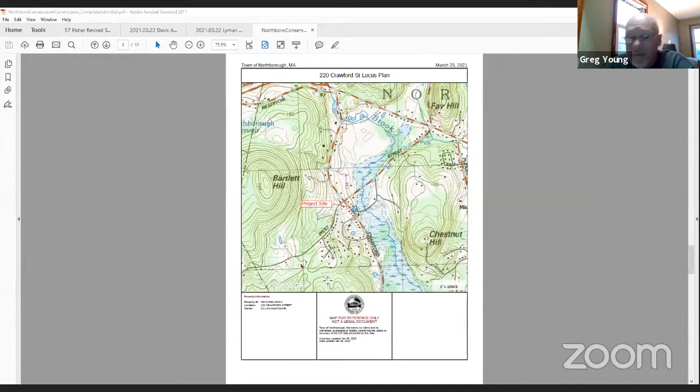Mia, do we have any plans to put up? Sure, I can share those for the commission. The house is located right at the corner of Cherry and Crawford. Can you see the project site? Yep, and then that's the current layout - chain link fence along the edge of the property with wetlands right beyond.

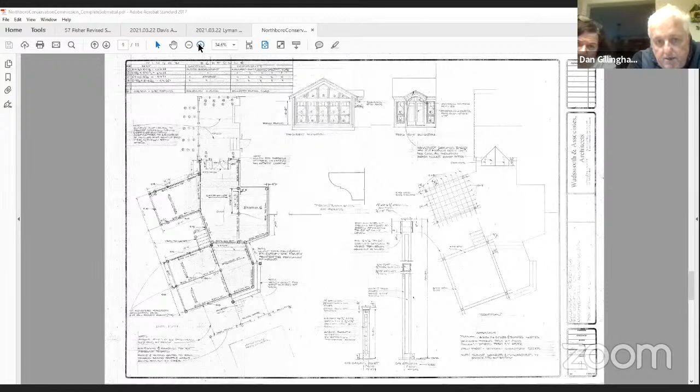These are the architectural drawings, Dan? Yeah, correct, they're the preliminary ones. We haven't arranged with a contractor yet, and we may have to downscale our sizing a little based on the costs of lumber these days. So that's what the extreme was, and we're going to put it out to bid that way.

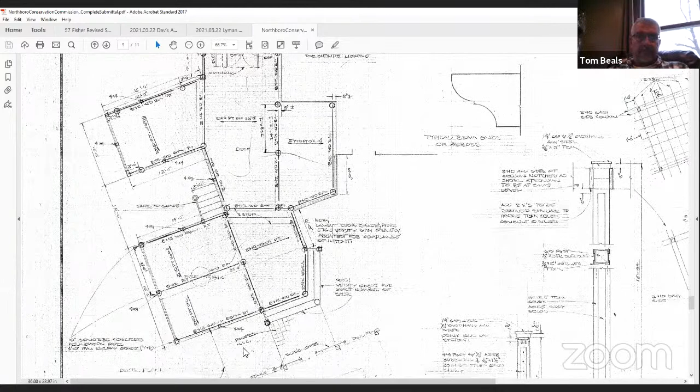Do we have any photos? Yes. So when you're standing on the deck looking at the pool, the land slopes off to the right fairly significantly, going down to the chain link fences, and the wetlands lie beyond those fences. That's for the front yard - it's from the front. So the deck's going to go off the side there.

There's the old deck. There's a better one in here. So the deck's going to go off to the right toward the forsythia, and that slope down is pretty steep with the chain link fence at the end.

So we're going over existing lawn. Correct, yep. And how far is the deck from the wetland boundary? Mia, what was it? About 40 feet. Outside the no-build zone.

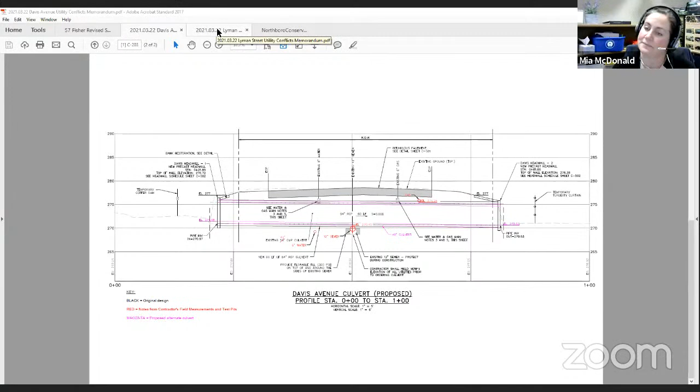I would like a vote that you find it insignificant or significant, depending on what you think. I recommend it's insignificant. So moved.

Second. Diane, roll call. Todd Helwig, yes. Diane Gouldner, yes. Kelly Marston, yes. Dan Clark, yes. Justin Dufresne, yes. Tom Beals, yes, and I will vote yes.

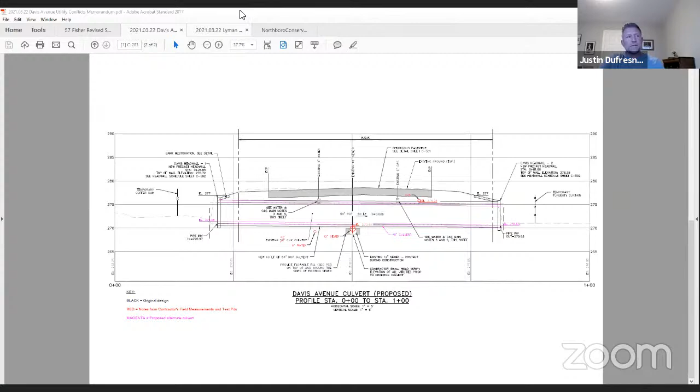Can you see Lyman Street now? Yes. So the changes here: the location of the 4-inch gas main was confirmed above the existing culvert, and the 12-inch water main was found to be located below the existing culvert, conflicting with the original survey.

The proposed 48-inch culvert with 24-inch embedment—remember, this one was going to be embedded so that it was almost like an open bottom to create some natural substrate—can't be constructed as approved without major impacts to the existing water and gas.

They're proposing to install a 30-inch reinforced concrete pipe in lieu of the previously approved 48-inch. They're not losing any diameter because the previous 48-inch was going to be embedded, so it'll still handle the flow, but we'll lose that natural bottom.

The proposed alternative does not include embedment of the culvert due to the location of the water main. The proposed inverts of the 30-inch culvert are shown in the attached figure, and they updated the HydroCAD, and it will still provide the needed flow for the 100-year storm.

So this is it here. Again, I recommend this one—it's insignificant as well.

Questions or concerns? Can we get a motion? Move that there's no significant change.

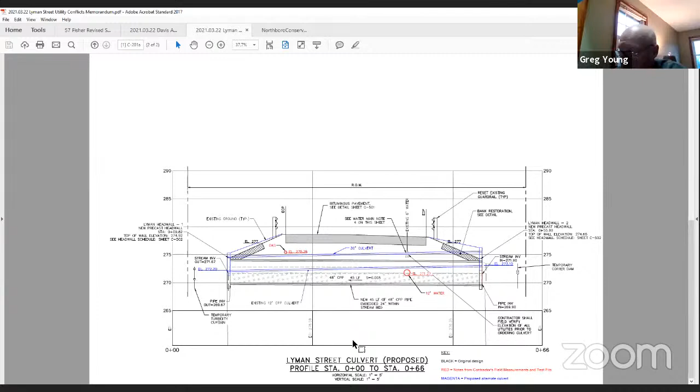Second, seconded by Tom Beals. Roll call. Todd Helwig, yes. Diane Goldner, yes. Kelly Marston, yes. Dan Clark, yes. Justin Dufresne, yes. Tom Beals, yes. I also will vote yes.

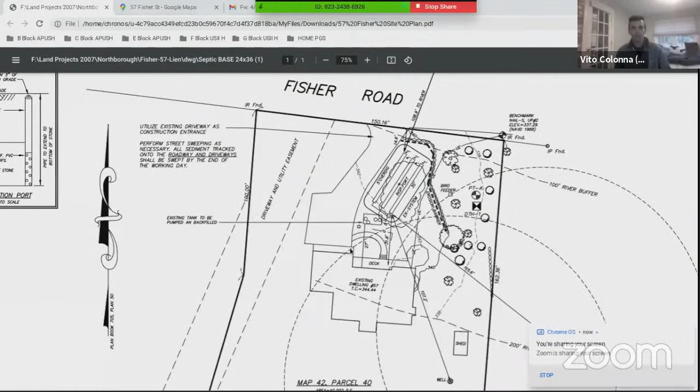I can share my screen quick here. Okay, so this is the plan. 57 Fisher Road is off Church Street. Come down Crawford and turn onto Fisher, and it's right in here.

There's a stream across the street, Cold Harbor Brook, that's across the street right there, and that 200-foot riverfront area extends well up into the site. So we did look at moving the system towards the rear of the yard, but there are 2 wells, one on site and then one on the abutter's site over here.

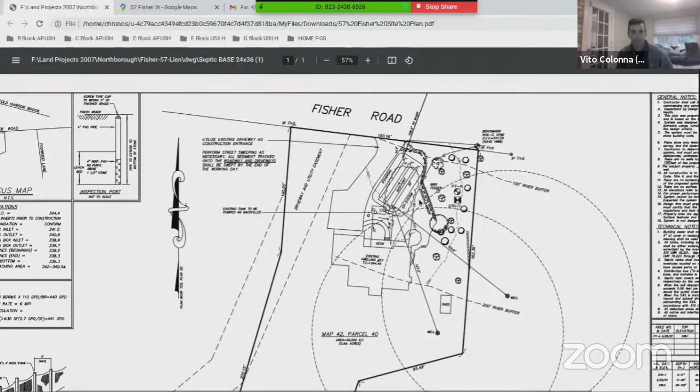So that kind of pins us in with the 100-foot offsets from the wells. It doesn't really give us too much space to work with. So this is kind of the only area left on site to locate that replacement septic system, and it's actually in the same spot as the existing system now. So we just remove the old one, replace it with a new one, with all new components. And we have the erosion barrier around the edge of the limit of work. And then in the end, we're set about 108 feet to the end of the river, so we're outside the 100-foot buffer, but still within that outer 100 to 200-foot riverfront area. I think that's basically it, pretty straightforward from our end anyway.

Peter, where's the new tank gonna go? It's right in here, essentially where the old one was. We're kind of just pulling the old one or backfilling it and then putting a new one in.

Questions from the commission?

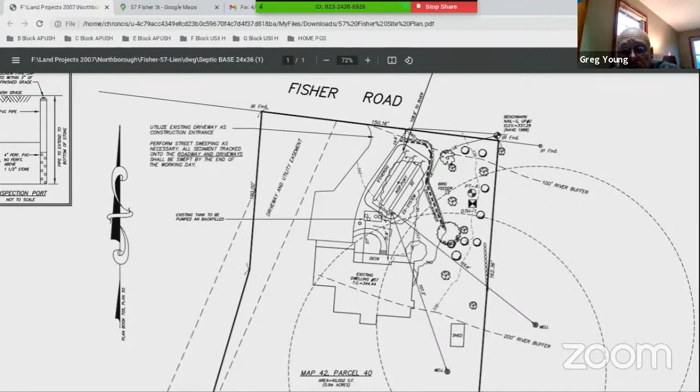A question on what we can do without getting a DEP file number or review by DEP. You can, but I don't recommend ever closing without a DEP file number. Right, so we will have to continue this until the next meeting.

Yeah, because most of the time, Vito, you can correct me, but if it starts to really fail, they can pump the tank and that'll give them another week or two. But if it really drastically fails and we have sewage coming out in the street, we can proceed under emergency certification with the plans as shown until we can issue the order next month. Yeah, that's right.

We're going to continue this to - we'll just say the May meeting.

We should grab public comment if possible. Let's see if we have any public comment. Anybody? I'm looking for, I don't see any raised hands. Nope. Going once, twice. Done.

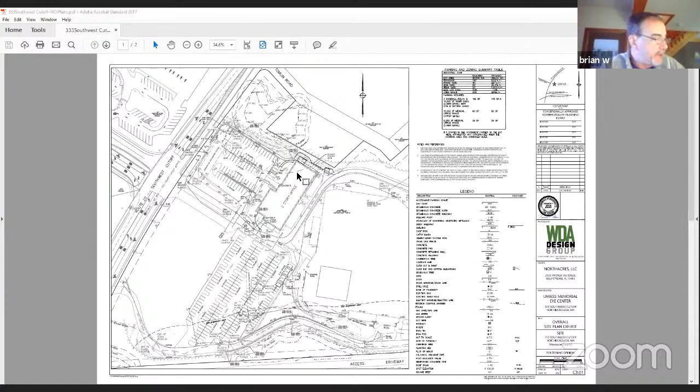Do you want me to share my screen with the plan? Sure, if you would. Well, this is kind of the overall plan. So it's the two-story office there, and as Mia's circling, we're proposing essentially a 15 by 23 foot addition off the end of the building. This is to house an elevator and stairwell to service the UMass building.

The medical office is on the upper floor of this building, and the New England baseball had space on the bottom, but UMass is taking over some of that space. Their services have expanded, and it needs to be serviced by an elevator. The only place to put it is in this location. So the idea would be to...

Mia, do you have the new plan I sent you this morning? Oh, was that this morning? The one that we adjusted, the one wetland flag there and the setback? Let me grab that.

Can you see it? Nope, that's not it. That was our site walk. Yeah.

No, I have— all right, well, oh, there it is. No, I do have it. It was with the estimates. Yep, here it is. Excellent.

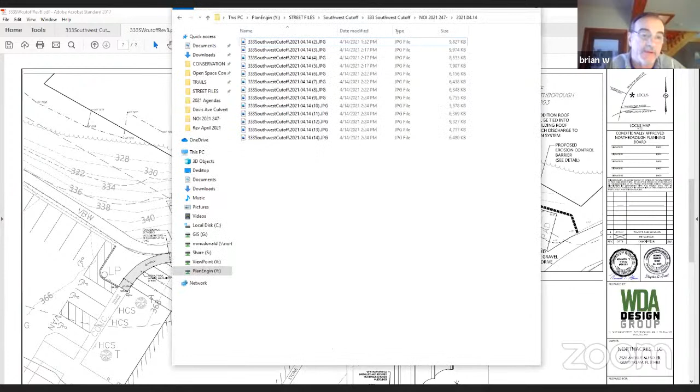So we'll create that cut to about 2 feet, where you see the spot grades there from 347 along the edge of the building down to 345. It'll be a 10-foot wide gravel path just to get the machine in there, and then they can back out. The existing grass that remains on the side slope below the erosion control will stay, and anything disturbed above it will be reseeded.

And Brian, how far down are they digging, how deep? I believe it's 4 feet, but is Greg O'Connor on with us, the architect?

Should be Greg O'Connor Architects. Yep, I just promoted him over to panelist. He should be with you shortly. Thank you.

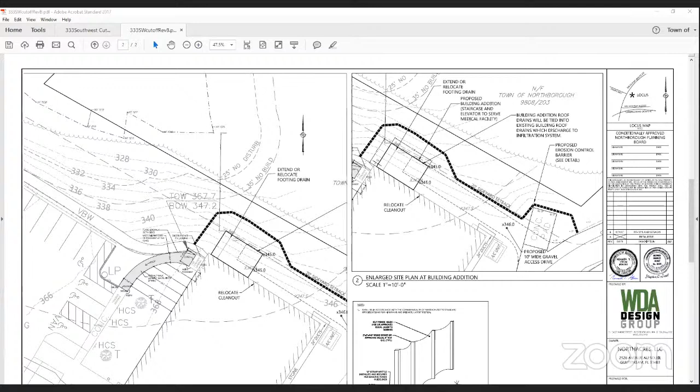Yes, Greg O'Connor here. Hi, Greg. This is Brian—they had a question on how deep we need to dig, and I was recalling that it was 4 feet. Yes, 4 foot. Okay.

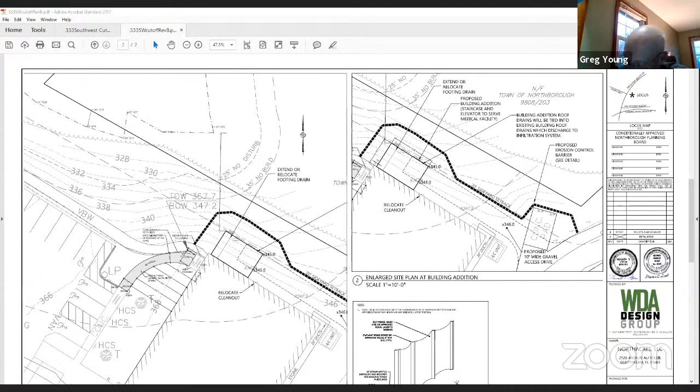Mia, do you have some photos? Sure.

Can you see it? This is the wetland from the parking lot in front. Yeah, that's up on top of the retaining wall. And this is the corner of the building from the front. Then this is the slope—you're talking roughly where those windows are going up.

So as you saw, wow, action photo—you're there for scale, that's an action photo. I don't provide much scale.

And that's the wetland below—you can see a couple of the blue flags there. The wetland actually is above what you would see, the herbaceous breakout there. But you can see an old silt fence remaining from the historic project, the black line down there. So we discussed the new silt fence comes up quite a bit from that—it's halfway up on the slope. That can either be taken out when they put the new one in, or wait till the project's done and take them both out when things are stabilized.

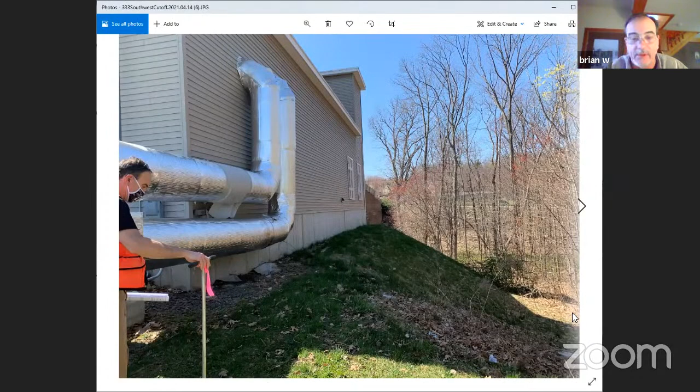There's not a lot of erosion potential once we cut the pad, the access pad, because there's still the grass between it and the face of it and the edge of the gravel. But once we cut it in, if you want to take a look at it and we think we should do something additional, we can certainly add something more. Between putting the gravel on the cut 10-foot wide pad and the erosion control barrier with the existing grass, it should provide a pretty good erosion barrier and not lend itself to a lot of erosion potential. But we can certainly look at it once we get it cut in, if you guys want to see if you think we should add something.

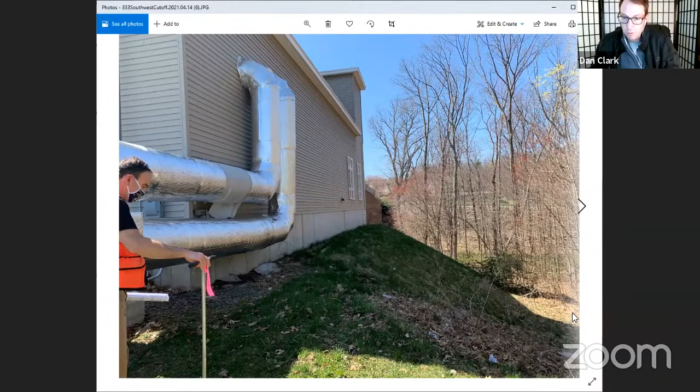Any questions from the commission? I had a quick question. What prevents you from using the other side of the building or the back of the building?

I'll defer that to Greg. Yeah, the decision to put this at that end is we are only renting that end of the building for UMass. The baseball facility will remain on the other end of the building, so UMass's space doesn't go all the way to the opposite side of the building. So, okay, so the baseball owns the building? The baseball folks are going to still have half of that lower level.

You seem puzzled still. Well, I guess I don't - so they don't want the elevator. The elevator is solely for UMass. It's not a common facility for the building. I see, okay.

You good for now, Dan? Yeah. Any more questions from the commission? Now, me and Brian - this access from the dumpster pad, that's just temporary then? So at the end of it, they'll just pull all that out and reseed it? Is that the plan for that? I believe that is the case, yes.

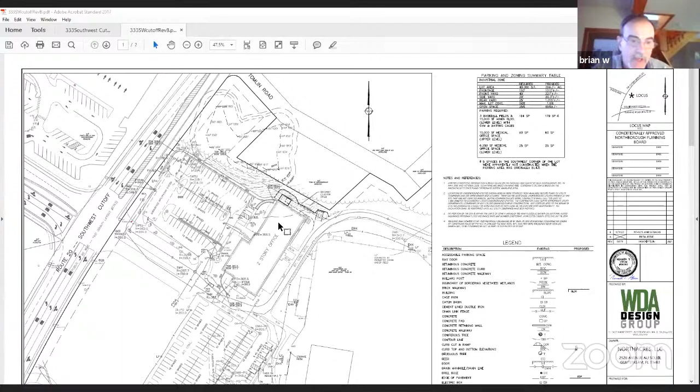No, what they - can you go to the full-size plan please, Mia? Might be easier to describe it in there. Right, so yeah, the parking for the baseball field is in that southern lot. And then their access doors are the two right-hand corner there. And then they walk down the paved bit conc drive to the lower ball field, or they just access into the two upper fields straight through there.

So there's really nothing - I mean, I guess if they wanted to take a walk over the grass or past the dumpster, they could, but as you can see, it drops off. And then if you go around there, it's down into the wetland, or you're at the base of the 20-foot wall. So if there's any trash, it's probably just when someone threw it in the dumpster or missed the dumpster, would be my guess. But the baseball players can go into the workout rooms and things at the bottom of the building through that back access, or they walk out directly onto the fields, or down the bit conc drive that goes to the rear field. Everything else towards the front is for UMass.

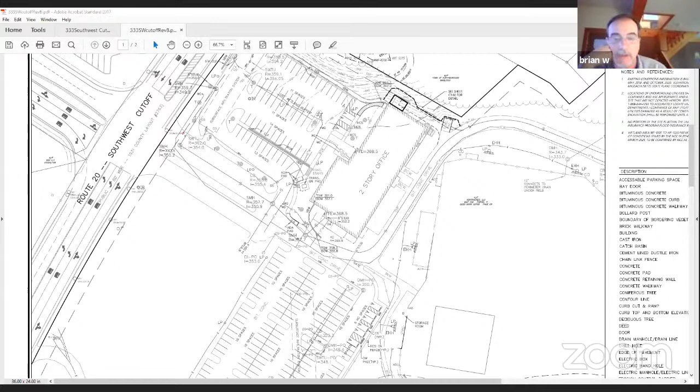Could I recommend an enclosure for the dumpster to prevent that trash from migrating? Can you go back to the photos? I didn't remember a lot of trash, but. There's not a lot, I just noticed some, and you know. We had the other day - the majority of trash was by far disposable face masks.

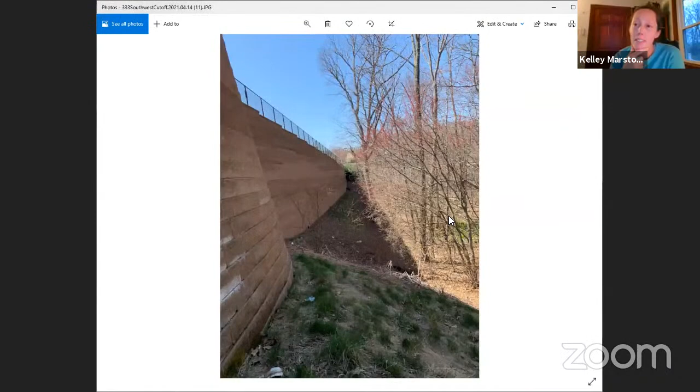Yeah, yeah, in front. Fortunately, but I just know kids - if you give them a place to hide and hang out, they're gonna hide and hang out. Well, these kids are under the gun, that's high-end baseball, so when they're there, they're being put through their paces. Trust me. But yeah, I do see some debris, but that could have been from old construction stuff. That's - things already cover on the dumpster too.

It looks pretty clean around it for the most part. There's a few odds and ends that could have been old construction cups or something, but the majority of the trash was up here along this chain link fence, and it was all face masks and gloves. It's generally contained up there, one because of the fence, it can't blow over, and two, you have a curb. So that's really housekeeping for them to clean up in the spring, or maybe eventually we'll get away from having face masks on all the time.

Are you good? Any questions? Any follow-ups? Okay.

Mia, there's a question here about the stormwater system not having been maintained. We talked a little about that, why don't you give us a brief. Yeah, I was looking in the file. I didn't find any reports for the maintenance of the stormwater system, or a statement that the system had been constructed and was functioning as designed. So I asked Brian, and today the owner has contracted someone to do the initial cleaning, and they provided an estimate for annual cleaning, which would be nice if they provided.

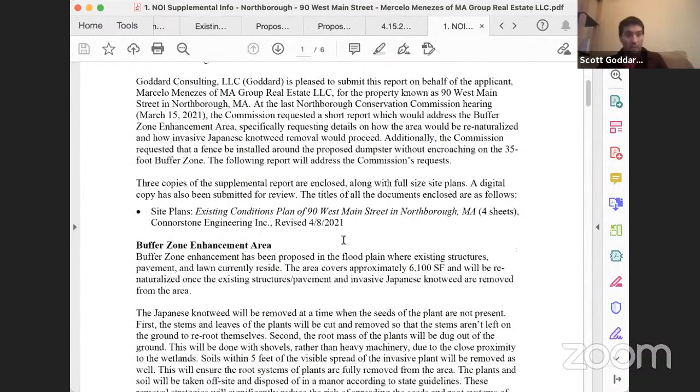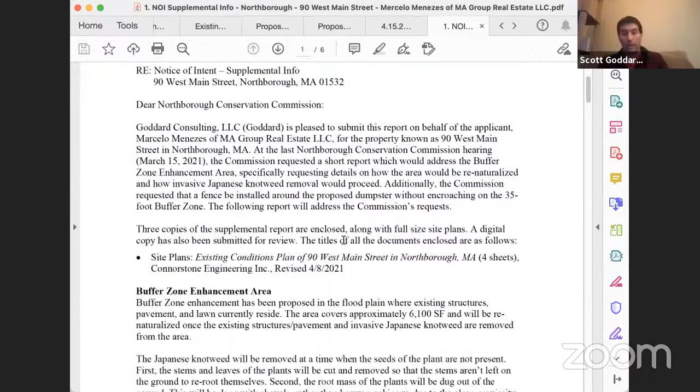Scott Goddard, professional wetland scientist representing the applicants at 90 West Main Street. This letter is supplemental information that was submitted discussing the buffer zone enhancement and the removal of the Japanese knotweed that was requested, sent in by Mitch from my office. Then we have the existing and proposed site plan. The only modification since the last version you all saw was showing the chain link fence around the dumpster pad at the rear of the building, which was the only remaining issue at play.

There were some DEP comments that came in that I can address briefly. Also, a question came up at the last meeting about the overall reduction in impervious surface within the riverfront area. The existing numbers show 4,140 square feet of impervious surfaces, structures, and pavement in the riverfront area, and our proposed condition is 70 square feet, virtually eliminating all impervious surfaces within the riverfront area on the site. Also, the limits of all these activities are pulled much further back.

So it's not just a reduction in area. The work we're doing is only at the furthest extent of the riverfront area, as opposed to that 4,000 and change, which is all much closer, of course, to the river.

There was a question from Kimberly Roth at DEP about reviewing portions of the project under 1058-4. That is really not appropriate in this case. This is a redevelopment project. We're not considering the lawn as a degraded surface. It's part of a larger prior development of the site made up of both degraded and non-degraded previously developed surfaces. So there's really nothing on this site that warrants a 1058-4 type of analysis. Any alternatives that were presented would only be alternatives that would have greater impact to riverfront area. So it's sort of an unnecessary exercise in my opinion.

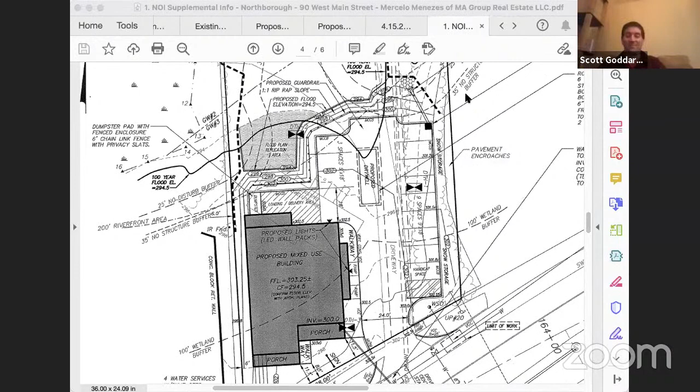Okay, so is the plan here, let me see if I understand: the plan is to A, close the hearing, B, vote on the NOI, and if approved, condition the issuance of the NOI based on receipt and agreement of the table from Scott to Mia.

So moved. Can I do that? You got to make a motion to close the hearing first. Is that the understanding, Mia? We're going to do it? Yeah, we'll close the hearing, as long as we're okay with that table coming in.

Just checking minutes. Make a motion that we close the hearing. Second by Diane. To close the hearing, roll call vote: Todd, yes. Diane, yes. Kelley, yes. Dan, yes. Justin, yes. Tom, yes.

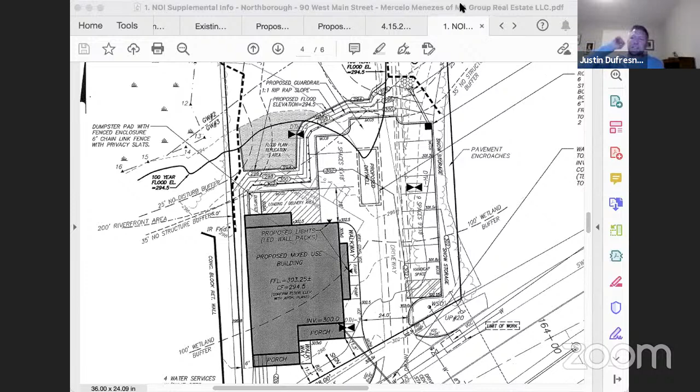And I vote yes. I missed the motion, who made the motion and seconded? Motion made by Tom, second by Kelly, wasn't it? Yes. Or Diane? No, Diane seconded the motion. Okay, I agree with what you first said.

Okay, for special conditions, I have noted monitoring of the replication area. It's going to come over from the previous order. Right. Typical stormwater maintenance and O&M, and the O&M will be appended to the order. Anything else?

Receipt of that table, prior to issuance. Is it just a table, Mia, or is it more than the table? I don't want to pigeonhole this if it's not correct. The table is just quantifying impacts to the RFA as new development and redevelopment separately.

Okay, and that'll be received and agreed to by you prior to issuance, correct? Prior to issuance, or issuance is the proper term, I guess. Okay, so we're voting now on the permanent markers, trying to think of any other conditions.

I think we have a pretty good drop off there, so I actually don't recommend permanent markers, and that replication area is filling in fine. Yeah, and that'll be way in the back, but then we're going to have the naturalized BLSF area. How much is that? Oh, no, it's good, it's a nice steep drop off. They're not going to get their mower down there.

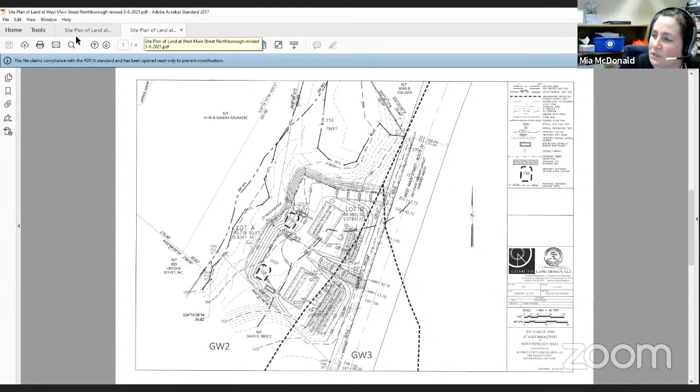Can you see it? This is the revised plan. I'm just going to show you the original too, so you can compare. Look at the slopes along the back, make it a little bit larger. Sure. Okay, so this is the previous revision, and this is the new revision.

As Mia switches back and forth, you can see on the north and west sides of that driveway serving Lot B, we had proposed a 1-to-1 slope. In response to the commission's request at the last meeting on March 15th, we pulled that driveway slightly towards the house on Lot B, and I propose now a Canigliaro block retaining wall with 3.5 feet exposed height. Those small changes allowed us to change the proposed slope below the retaining wall to a 2-to-1 grade.

And you still stayed outside the 25, is that correct? Correct. We essentially did not move the erosion control barriers from the location previously shown. Maybe there's a symbol here or there that moved a fraction of a foot, but it's in essentially the same location.

Can you shrink that down a little bit? You want it smaller, to get a better view of the whole site? Sure, yeah. Okay.

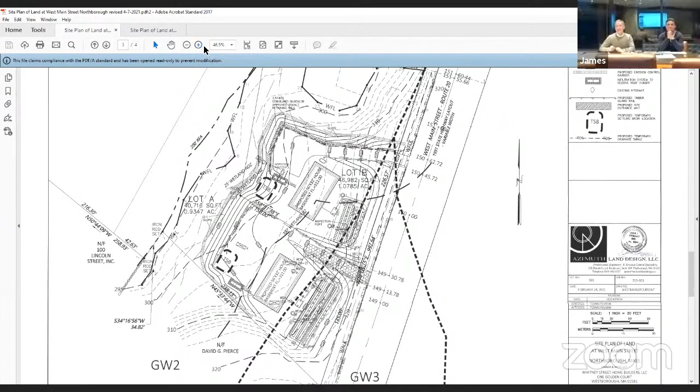I had sent an email to Mia to ask that specific question. I was 99-point-something percent sure that the wall would count as a structure, but I asked and she quickly emailed me back that it would count. That was actually why the limits of the driveway moved slightly. I had to move those limits to be able to keep the wall, because we're showing the wall as a 2-foot thick structure, which is what those Canigliaro block walls are. They're typically a 2-foot thick block, also 2 feet high. In this case, you'd have the bottom 6 inches not exposed, so you'd have a two-layer thick wall to get the 3.5 feet exposed height.

Yeah, I know that Mia received quite a few phone calls from the public as you started to do some work on the site. Yep. I believe we had an issue with the erosion control devices, but they've been positioned correctly since then.

True. What Mia sent us is a message noting that in two areas, close to flag numbers 7 and 8, and close to flag numbers 23 and 24, where S&M Farms had put in the barrier, they had just done a straight line and got closer than shown on this plan in those locations. There's no work going on currently. As soon as an order is hopefully issued and work is allowed to proceed, we will move the barrier. We will contact Mia to confirm it's in the correct location in those couple of spots, and then we would proceed with work from there.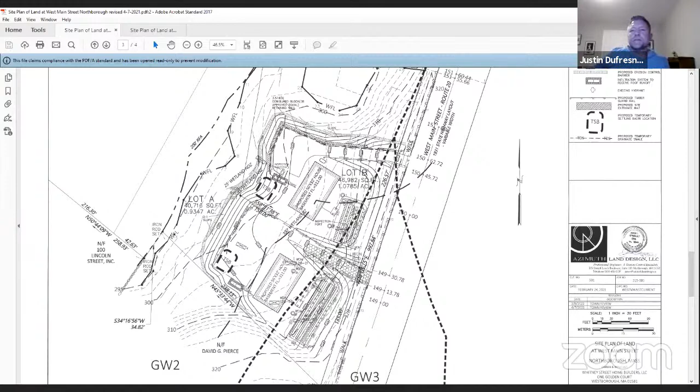Is it just me? I'm having trouble seeing the extent of this driveway. I can see the top driveway. I think it comes around the back. Oh right, it's all of it.

Unfortunately it almost overlaps the 100-foot buffer zone line behind the house on Lot A, so it's hard to see there. Underneath we have the line for a temporary drain swale, which is right along the edge of the pavement but further back. So there's two different lines that almost overlap, sorry. I just wanted to make sure I could see it. It's there.

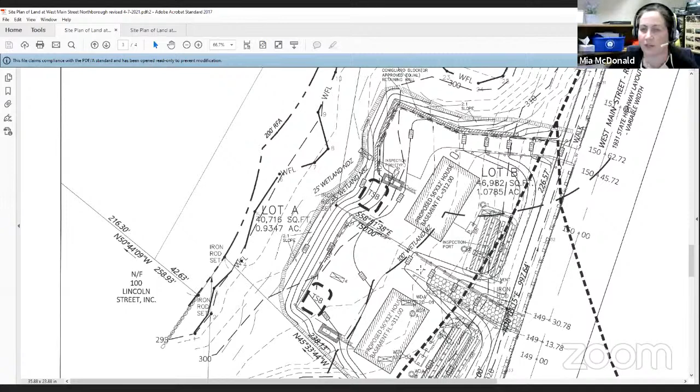I think everything that we asked for has been met.

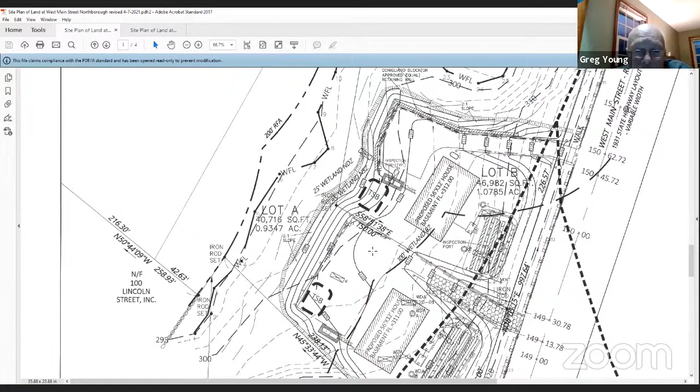Any attendees, any public comments? I don't see any.

Kelly, we should ask your friend to rename if it really is someone different, just because for the public record we do ask people to identify themselves.

I did, I just texted them and forwarded my link. I went to the town's website, since it's kind of hard to find if you don't know where to go. So I dug through, opened the agenda, and copied the link for them. So they show up under your name as an attendee? Yeah, probably. We attended a friend's thesis dissertation today too, we do a lot of things in a group. And what better way to end the day than attend the Concom meeting? So there you go.

Okay, no more questions from the commission? I agree, I think everything we asked for has been done. That slope is gone from 1 to 1, and they've taken the approaches there.

So we'll motion to close the hearing. So moved. Seconded by Diane. Vote to close the hearing: Todd Helwig, yes. Diane Gouldner, yes. Kelly Marston, yes. Dan Clark, yes. Justin Dufresne, yes. Tom Beals, yes. I also vote yes.

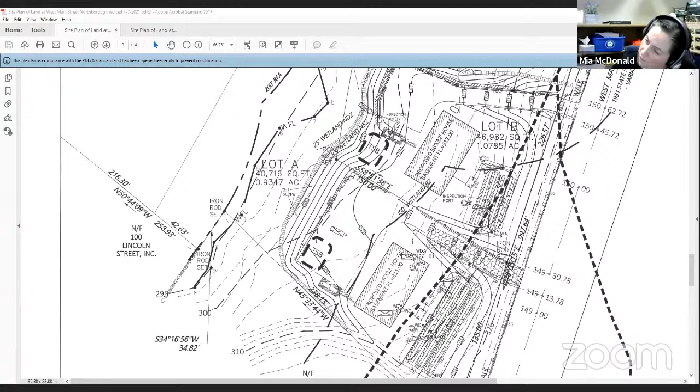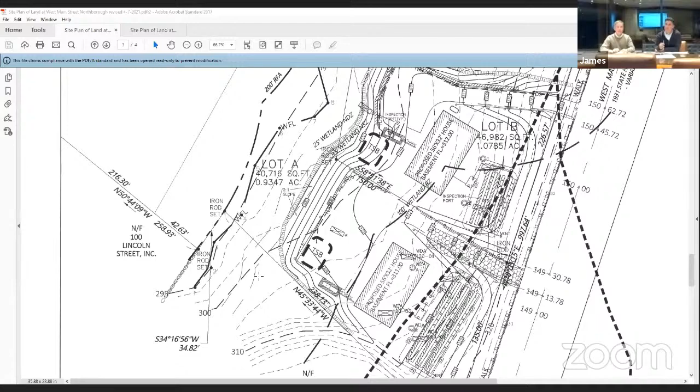I guess it's a little hard to say, it depends on how the plow driver is doing his thing. I just worry about sand and salt mixed up. I know what my yard looks like in the spring, so I can only imagine what that's going to look like.

Yeah, we don't want it pushed back here. These are just houses, right? Yes, I don't think we've ever required anybody to show a snow storage area for a single family home before. Who knows what they're going to do if they use a snow blower. I don't know that this is something we need to get into. Agreed.

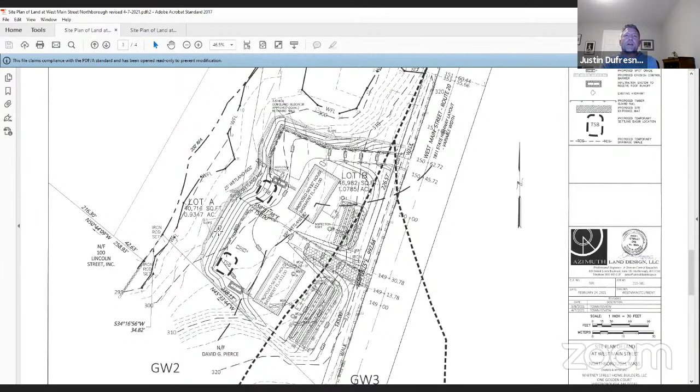I'd say the good thing with the guardrail is, not only from a vehicle standpoint, but from a plow standpoint, you're not going to be lifting it up over the guardrail unless you're in there with a Bobcat or something that could get it over the top. So I think having the guardrail alone should help prevent a little bit of that snow from getting back there, and I'd guess if it's a plow, they're going to push it more toward the sides that Mia identified, more so than the back. So I think we're probably good.

I would agree, that's good. Any more questions or comments from the commission?

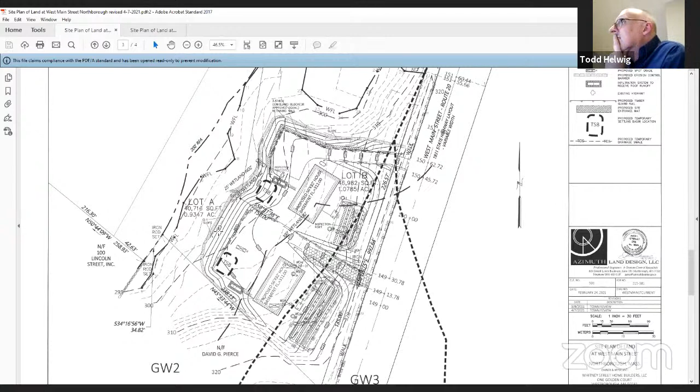I would like to make a motion to amend the order of conditions for 0 West Main Street to allow the construction of the 2 houses as shown on the plans, subject to the conditions we have discussed. Second, by Tom Beals. We'll do a roll call vote: Todd Helwig, yes. Diane Gouldner, yes. Kelly Marston, yep. Dan Clark, yes. Justin Dufresne, yes. Tom Beals, yes. And I vote yes.

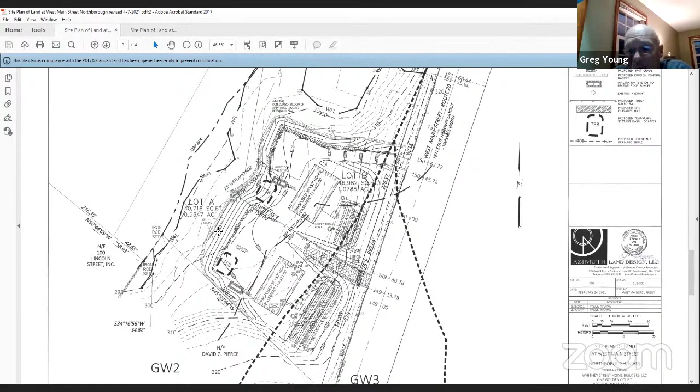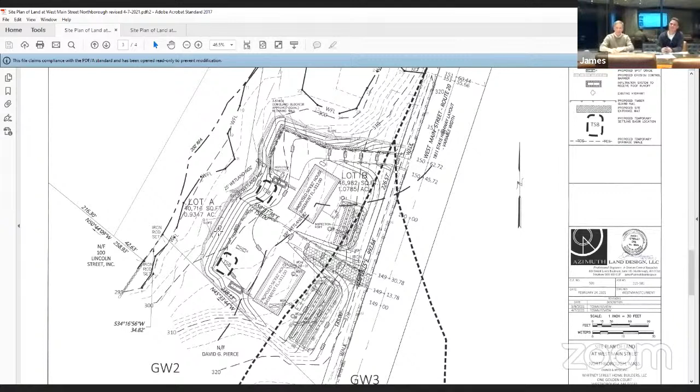Very good. Thank you, board. Thank you, folks. Well, thanks for working with us and coming back with the requested changes, appreciate that. And stay close to Mia. That site, I'm going to get lots of calls. So yeah, we're going to get lots of calls on that one. Understand. Thank you. Thank you, gentlemen. All right.

Moving right along here. We're moving right along, Mia. We are cooking. Well, I just jinxed it. All right, no, we jinxed it. I just jinxed it too, so.

Okay, let's talk about 85 & 95 West Street. And I believe that is Brian Waterman. Anybody else, Brian? How are you doing? Hi, Mark Kablak is with us. Yeah, Mark's here too. Yes, I'm here as well, Brian. Thank you. And Mark, what is your role? He's the attorney for the applicants. Okay good, thank you. All right, so where are we? We've been making some progress here.

We get some questions around the stormwater system and a culvert replacement, I believe. Yes, it's actually been since December since we first met on this. So we've continued. Mainly the two largest questions — well, there were three — the primary one was the permeability testing requested in each of the infiltrators, and we also did deep soil tests for composition. Those were completed and submitted to Fred and Mia. I'll go on that a little more in a minute, because that required some revisions to the design systems. The culvert, the existing historic stone culvert under Cherry Street—

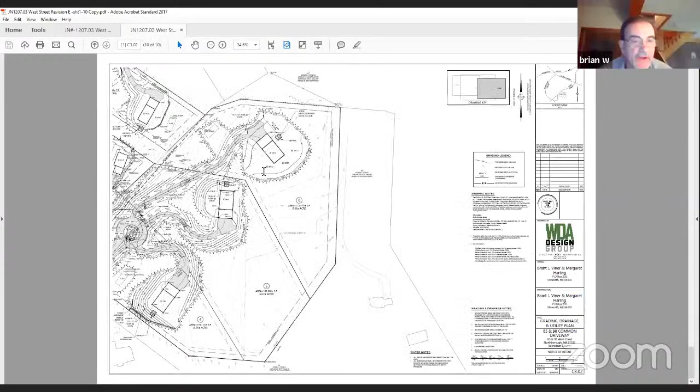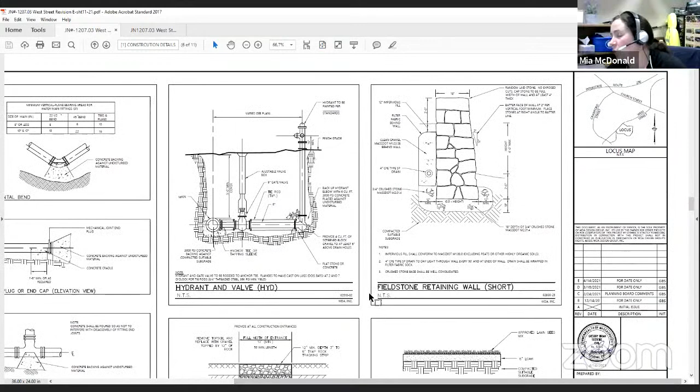I forgot about that one small stone retaining wall there. I think there's three - one here, one... oh here, yes, because he tightened up the grading on that when we raised it. So they're just small stone retaining walls, like a foot. Do we have a detail for them? They're no more than 2 feet because of the grade there. I thought he had some top and bottom wall shots on there. He might on another plan. Here it is - it says fieldstone retaining wall on sheet C601, height 4 feet max. So it won't need to be more. Oh yeah, there's the fieldstone detail.

What else was on the checklist? Winter stabilization - we added seeding mixes on the sheets. There's a lot of sheets in here.

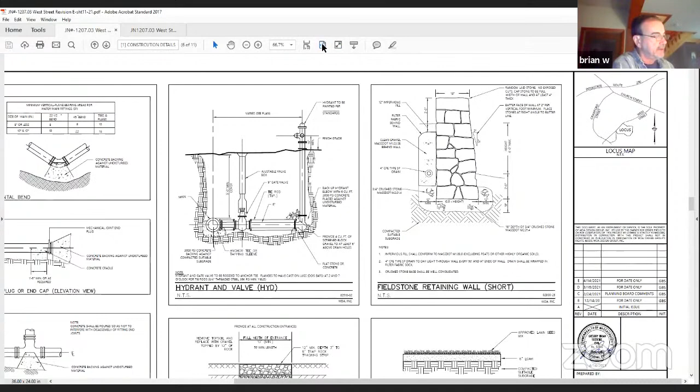We put a winter stabilization and permanent seeding note on sheet C602, so we have the permanent and seasonal seeding mixtures on there.

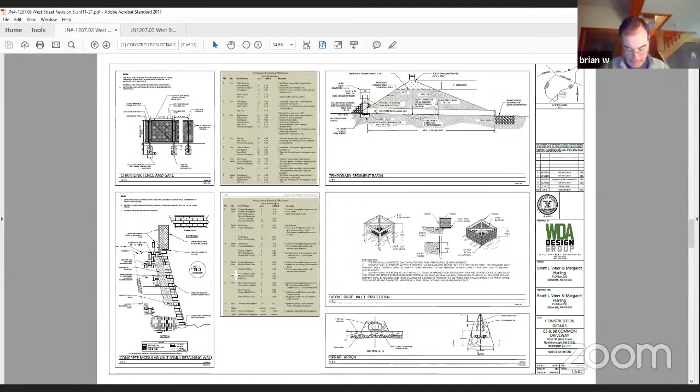What else do we say? Respond to Mass DEP comments. Mass DEP had no comments.

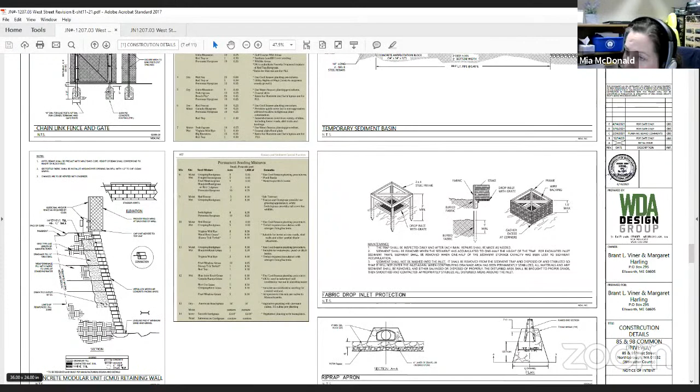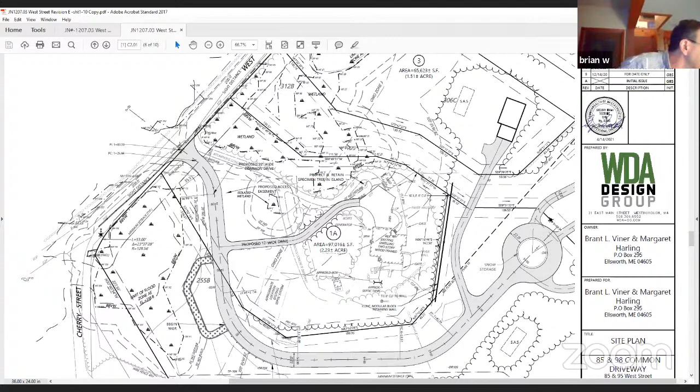And how tall is the reinforced retaining wall, this concrete modular one behind the existing house? Let's see, he's got a contour there of 342, and this is 340. That one looks like it runs from 2 to 4 feet. That's outside the buffer zone, but it looks like it's 2 feet on the low end, and existing there is 336, and maybe up to 4 feet on the end towards lot 3.

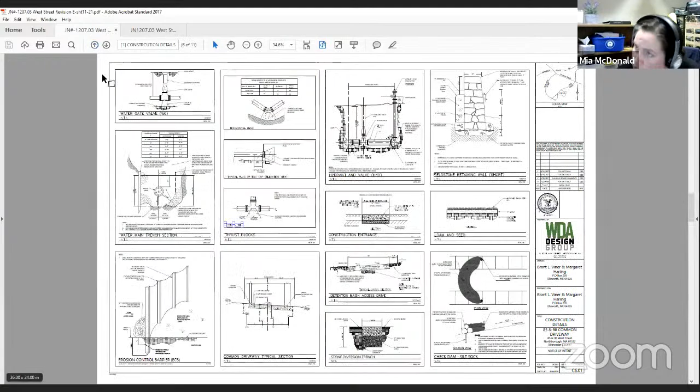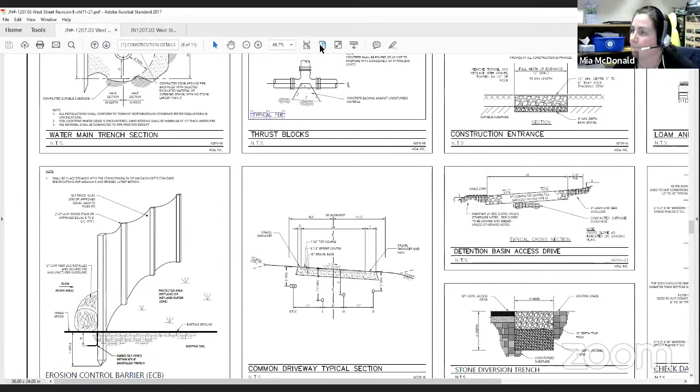Okay. Also, I hope I'm not taking you off track, but I found the detail for the erosion controls on C601, and it's still calling for the 12-inch. Did he not adjust that there? Yeah, 12-inch coir log. All right, well, that's a boo-boo. That's a small change, but it's what the contractor has in hand. Maybe he called it out in a note on one of the other plans, but I'll have that fixed.

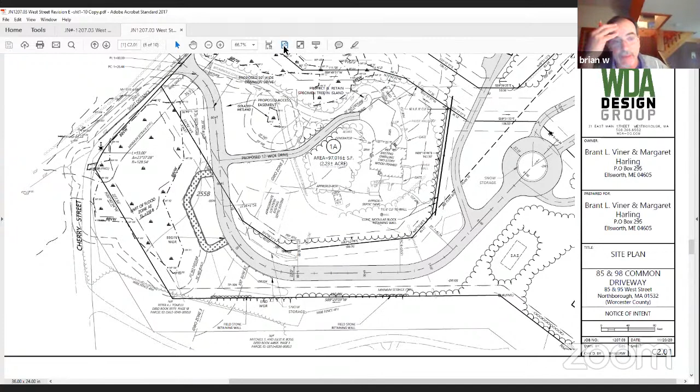So I think we've addressed everything and anything that's been asked. So I'll turn it over to you guys for questions or comments.

One question I have is about the abutter who attended a few of our meetings, Mr. Tonelli. Have there been any conversations with him? How is he feeling about all this now? I know he had some concerns originally, and I think you might have addressed them with your redesign of some of the flows. Yeah, his concern was the runoff from directly at lot 4 there.

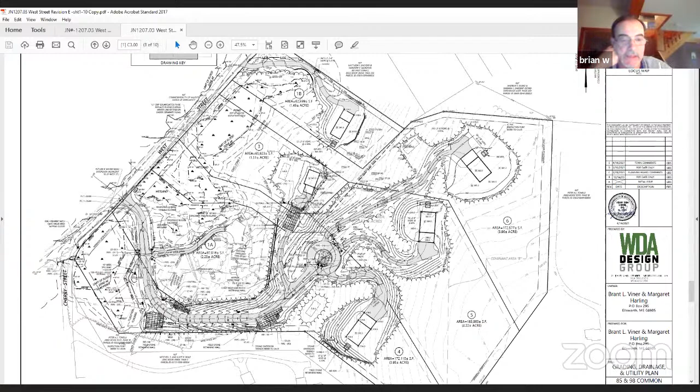Mia, if you want to zoom down to that. Yeah, if you can zoom. Sorry, that's okay. Hang on, went too far. The joy of Zoom meetings.

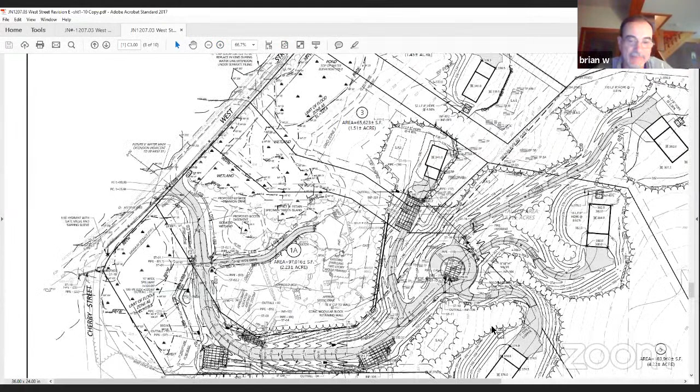So you can see that there's a very large hillside that flows towards his land as it is, and some of that's going to remain since we're only clearing around the house. But they had concerns about the immediate side yard directing flow directly, reconveying it down that way. So we added the small retaining wall and put in a stone diversion trench, so it keeps everything flowing towards the front of the yard and down there. We had sent that to his attorney, Marshall Gould. We've since reached out to them and they said they were good.

Questions from the commission or comments? I have a question. Go ahead, Diane. How are you going to encourage all these people to keep these...

I'm having trouble hearing her. I'm sorry, how are you going to have everybody coordinate or cooperate to clean out all these basins? Do you have a plan for them? Oh, on cleaning the basins?

Yes, that's written up in the covenant and easement document that they will be signing as owners, and that would get recorded with an order of conditions. As Mia mentioned, they'd probably just hand them a copy of the plan, and as a homeowners association, they'll more than likely all contract with one contractor that'll maintain the system annually, kind of like we just presented on 333 Southwest Cutoff, hiring one of these stormwater control companies that comes in and can do regular or annual inspections, and jet or vac truck these things as needed to maintain them. That document was prepared by the applicant's attorney and then reviewed by Fred, Mia, and then ultimately town counsel reviewed it and had minor comments that were applied per his comments.

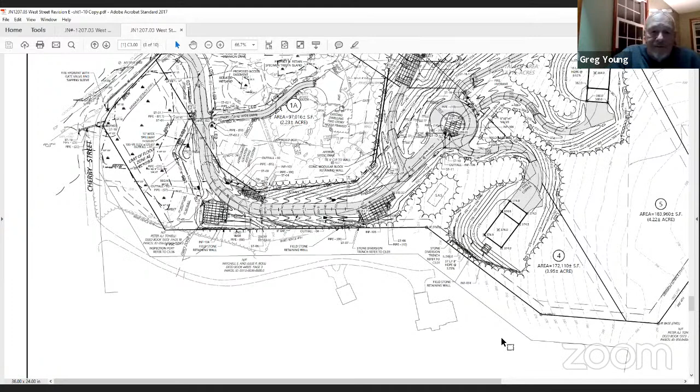Basically what Brian said is correct. The declaration gets recorded, and I would assume it will be either a condition of the order or a condition of the planning board approval. It gets recorded in the chain of title. The deed out for each of these lots will reference this declaration. The declaration has attached to it the operation and maintenance plan of the stormwater facilities that Brian just detailed.

The declaration has in it two provisions that I think address Ms. Gouldner's questions. One is there will be a homeowner association. This is not just an easement, this will be an entity that is created. Each unit on the plan, each homeowner, will be a member of this association, and the association will have a budget. The budget largely involves maintenance of the roadway and the stormwater structures, including whatever maintenance schedule and fee structure is required to operate these facilities. The homeowner association has enforcement rights over each homeowner. So that's the basics of the declaration itself.

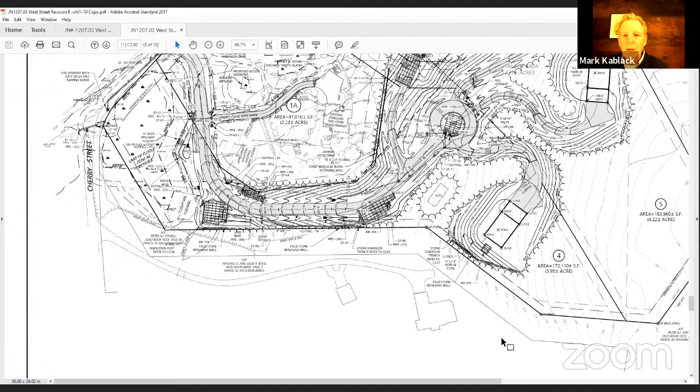In addition, in the declaration, the town has rights of enforcement, not obligations of enforcement. So in a worst case scenario, if there's total failure on the part of a homeowner and the association to follow the letter of the declaration, the town can step in, and the town has lien rights to recover costs under the declaration. So it's a formal document, it's in the chain of title. Each deed will be conveyed subject to this declaration, and the operation and maintenance plan that Brian discussed will be part of that. Thank you.

Okay, any more? Go ahead, Tom. My comment was going to be, I think that we've accomplished everything that we set out to, and I think we're at the end point here on this.

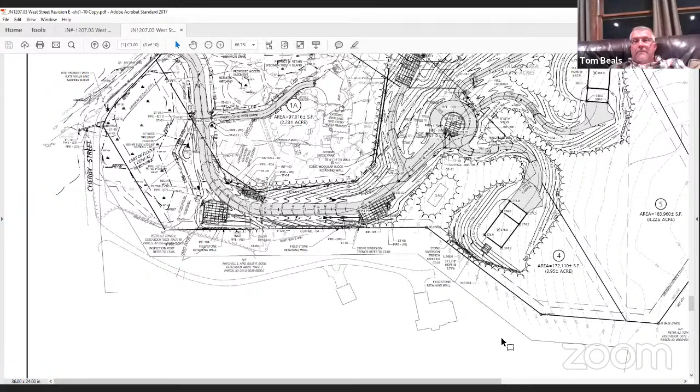Did they need planning board approval? Did they get it? Well, planning board has asked that we get approval from you guys first, and we have been continued to next Tuesday with planning board. But their comment was, let's see what Fred comes up with on the culvert under Cherry Street and addressing the infiltration questions. So we've addressed those, we feel confident that we've killed two birds with one stone here, working concurrently with both you guys and addressing all the questions. Planning board also deferred to us reaching out to Scott and the fire chief to confirm on the water line, which we agreed to extend to the hydrant to Cherry Street. So those were the three main things.

Good, Todd? Okay, any more questions or comments from the commission? One question I have is the culvert under Cherry Street, do we want to include that? The project here has agreed to include it in their scope. Do we want to include that on this NOI or on the forthcoming NOI for the water work and the other culvert? Either is fine.

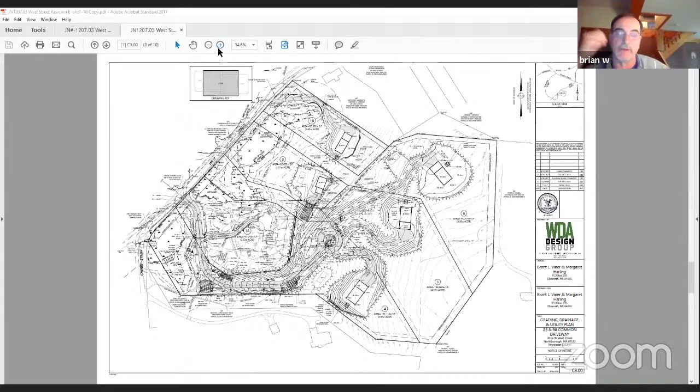I can send you an example of signage we've used in Westboro and some other towns. It's a nice sign that says wetland area, no dumping or mowing or things like that. I can send that example to you if you want. We have a green sign that just says wetland area, do not disturb, or something similar.

It's like a sign on a post, and it looks like it'll be in the woods. Can you guys see the plan? Oh, down there, yeah, that's 120 feet from that wetland. 120 feet from the pond, right here?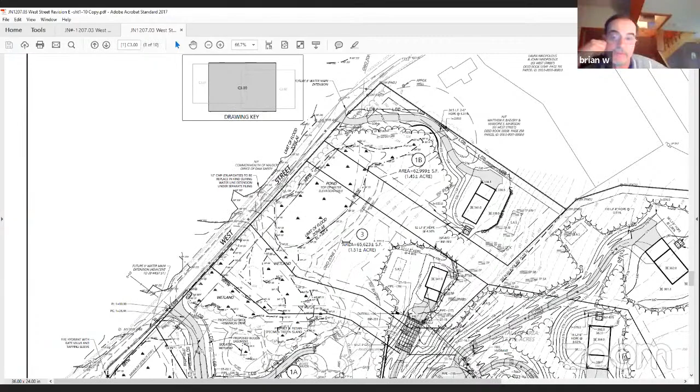I'm looking at the buffer zone, see the 35, the 100-foot buffer zone there to lot 3? Yeah, the clearing is about 120 feet from the pond. So the only area we're really close is that retaining wall up there, so that's a permanent marker.

So I'd say some signage along the wet meadow would be good. Yep, we are restoring, we're taking out the old driveway and then restoring that area, but that'll all be maintained as restored area.

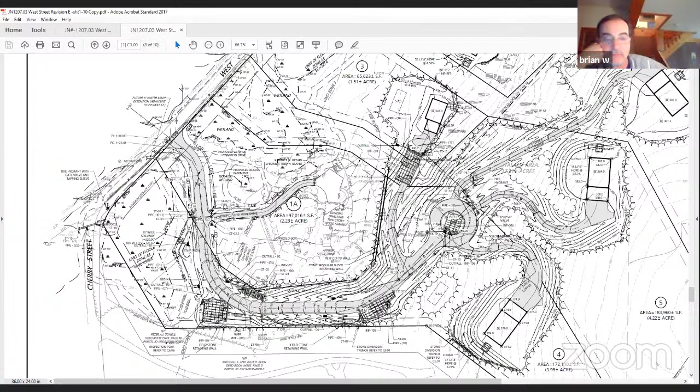It's really the wet meadow, I'd say, put a signage at each wetland flag, or if you want, 10 feet in front of each wetland flag. So you're in between the 25, or we can put it right at the 25 if you'd like, off each wetland flag. How many flags are we talking there, Brian?

How many flags are there? 3, 4, there's only about 8 along that edge, 6 or 8. Like a lot of signs. I was thinking like one per side, one in front, one parallel to Cherry Street, and maybe one in back.

Yeah, so why don't we do like 2 or 3 along the common drive between the wet meadow flagging and the no disturb zone? Do 2 or 3 signs there, right here, along that area from the entrance and then down towards where the other infiltrator is.

Yeah, all right, was it 2 or 3? Is that what you said? Why don't we do 3? 1 at the entrance, 1 in the middle, and 1 at the end.

Do you want to send me your typical sign, or do you want me to send you an example of the ones we've been using? It's up to you. We have, let me show you.

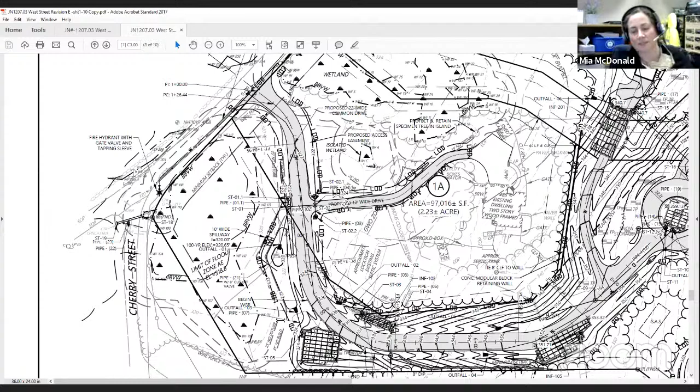And you can do any sign you want. This is just the one we have if you want to buy them or make them similar. Are they really $20 each? Yeah, we paid $20 for each one, so we just sell them for cost. All right, that's fine, because a lot of people only want to buy like one.

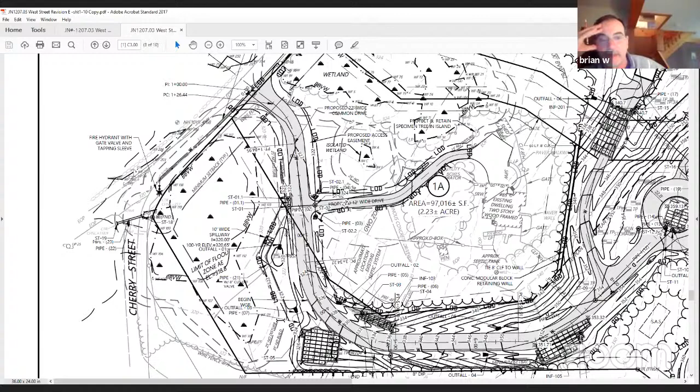No, I think that'll be nice. It'll look nice in that meadow off that edge. Be good. Okay. You got your special conditions, Mia? I think so. Okay.

So then we need to move forward with an order for 8595 West Street, so moved with the conditions that we just discussed. Second, seconded by Tom. We need to close the hearing first, right? I think we already did. We did, yep. So many hearings being opened and closed.

Okay, fine. Todd Helwig, yes. Diane Goldner, yes. Kelly Marston, yes. Dan Clark, yes. Justin Dufresne, yes. Tom Beals, yes. I vote yes.

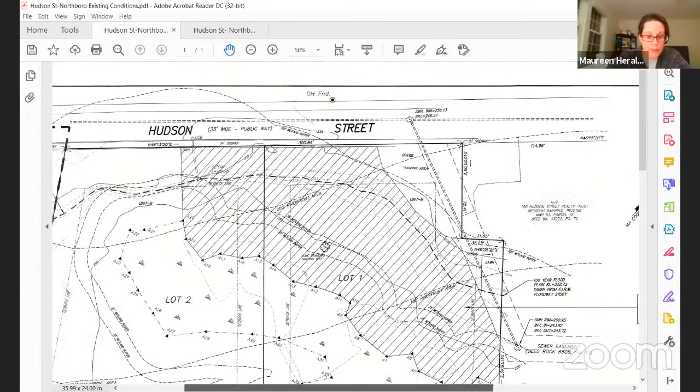Go back to the plan. So as the commission was discussing the riverfront issues, I have the same professional opinion as Scott regarding this: the regulations imply that because the riverfront area contains areas that are degraded, which is the existing compact gravel parking area, prior to '96, the entire on-site riverfront area is to be considered previously developed.

So as part of this, we have to improve the overall site conditions. I'm going to go back to the previous plan. The area that's in hatch here is dominated by a monoculture of Japanese knotweed.

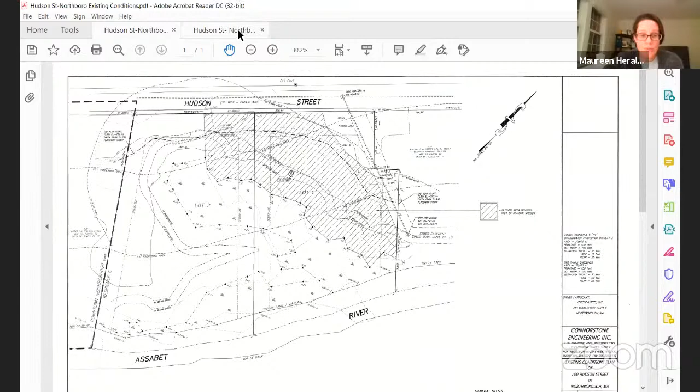So our intent is to improve the overall riverfront area by incorporating erosion controls all through here, to cut and remove the knotweed, as well as the topsoil area, and also do some herbicide applications because it's just necessary with that aggressive invasive.

And we've provided an extensive planting plan for this area as well, and we would monitor it for 2 years. So I think overall, we're making a valid effort to improve the riverfront area, to improve its function, and to get some natural native species back into this area as well.

We're also proposing to fill some floodplain area. So as I mentioned before, this is the floodplain area. We're providing compensatory storage in this location, as well as this location over here. We're proposing to alter 7552 cubic feet, and we're providing compensatory storage of 9131 cubic feet.

Also, as part of this filing, we are requesting a waiver from the 25-foot no disturb and the 35-foot no build, which you can see on lot 2. Essentially, the entire duplex is located within this area. Lot 1, we do not need the waivers for that.

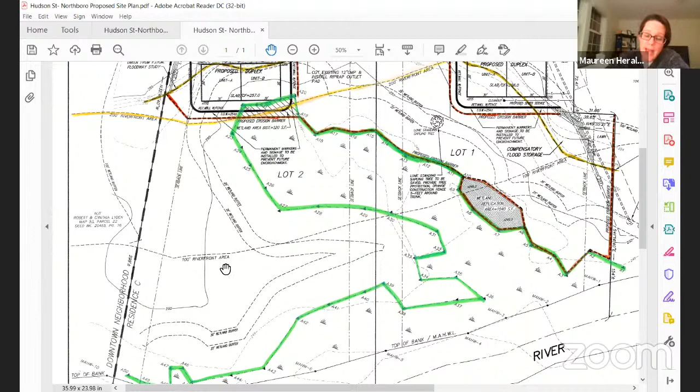Well, we did provide an alternative analysis for this, with the structure located over here in this location, which would essentially be outside of your 25 foot and your 35 foot. It's something that we think we can build. However, it really has more impact to the riverfront area than the structure being proposed closer to the street. You'd have to extend the driveways down, and you would have to perform more clearing. So that was one alternative that we did look at to comply with your regulations.

What about there just being one building and not two? Well, presently, this is actually 3 lots at the moment. So one of the alternatives that was considered was doing 3 single-family dwellings. We thought with this type of development, it's actually less disturbance than the 3 single-family dwellings.

There are 3 lots, but it doesn't look like there are 3 buildable lots with the setbacks. Are they? Wait, maybe I'm wrong, I can't see all of it. I could be wrong. So what you're looking at shows only 2 lots right here. You're correct about that, but there's actually a combination of 3 lots. So what we'd like to do is take the 3 lots and compress them to 2, and develop 2 duplex buildings.

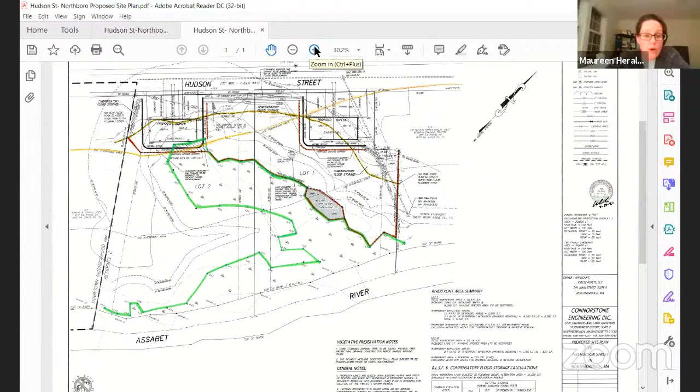I would support that. Part of the building is actually in the wetland. Correct, so on lot 2, where the area is hatched, we're proposing to alter 520 square feet of wetland, and we're providing more than 2 to 1 for the 1040 square feet of replication area.

I can certainly provide the alternative plan. Unfortunately, I don't have it with me this evening to show you that the alternative of complying with your setbacks and putting the building down here actually has more impact to the riverfront area than having the structure in this location.

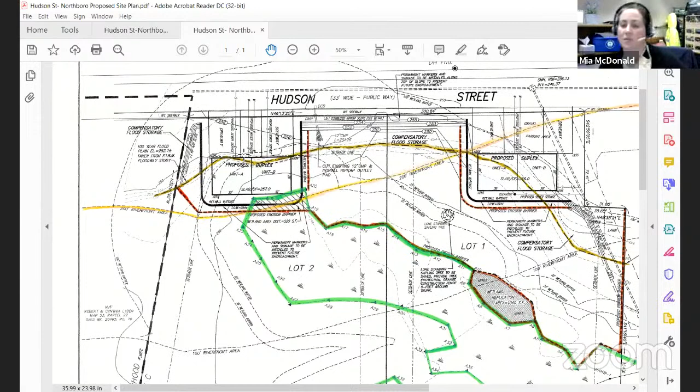I have the alternative plan if you want me to share it. That would be great, thank you. Okay, I think you have to stop share so I can share. Oh, sorry. That's okay.

So this is where the structure is that complies with your setbacks. It's a lot more impervious area than what we're proposing. Obviously, there's additional substantial grading along Hudson Street, parallel to Hudson Street.

Personally, I think this is just a lousy design. That's just my opinion. I think it would look nicer closer to the street.

In the area with the Japanese knotweed, I think we're doing substantial improvements to the riverfront area by removing that, trying to control and manage it, providing an extensive planting plan to improve the overall wetland habitat riverfront area.

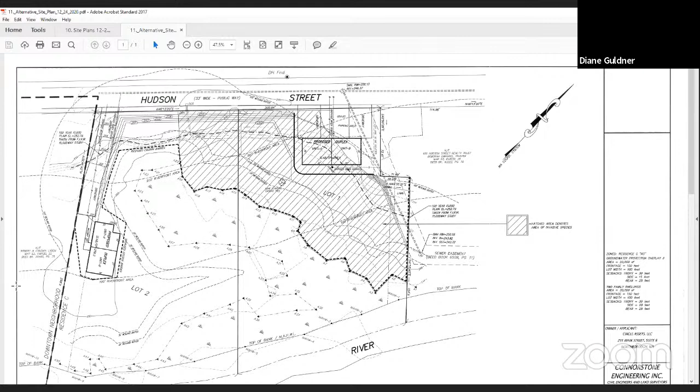And I understand it's late at night and it's a lot of information, and it's a complex project that I'm throwing at the commission, so.

Well, you did say you were trying to introduce it tonight, right? Right, I mean, this certainly isn't, I'm requesting the commission to close and issue a decision. Absolutely not, I just wanted to get your initial eyes on the project, get some initial feedback.

Obviously, need to review the wetland boundary. We need comments from DEP. We have a difference of opinions regarding the riverfront. So there's a lot of outstanding issues.

Yeah, so if the wetland delineation is completed, you may not even be able to build the one that you're showing right now.

I'm sorry, can you say that again? If I understand correctly, you've not completed the entire wetland delineation. And if you do complete the wetland delineation, you might develop information that would make the plan that I'm now looking at impossible.

The wetland delineation is completed. It was, when Mia went out, some of the flags were missing. There were some areas that she had some questions on. So we just need to review it.

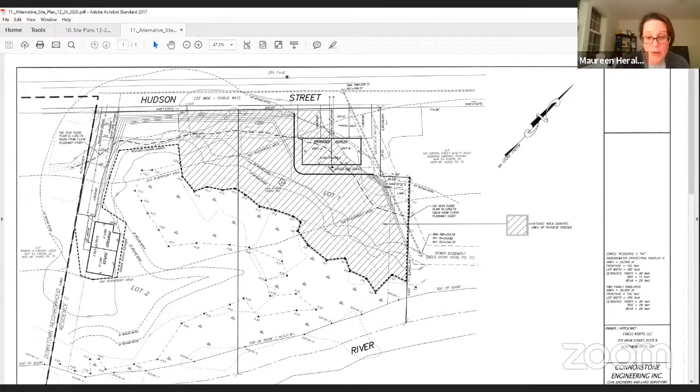Right, so unfortunately Japanese knotweed is just a nasty plant, and we're proposing to remove it. In fact, I submitted an invasive species management plan with the package. Essentially, we're going to cut it, remove it, remove the topsoil, and apply herbicides to it. It'll be a licensed site professional, a licensed herbicide applicator, that would be doing the spraying of this plant, and we're proposing to do it for 2 years. So by no means am I saying I'm going to remove it from the site entirely. What I'd like to do is make the site better, treat it, do the herbicide application, and also plant it with native vegetation so that it hopefully outcompetes some of the knotweed. And that's been provided in your packet as well. Very good.

So I think we need to entertain a motion to continue. I think that's a good idea. So moved. Second.